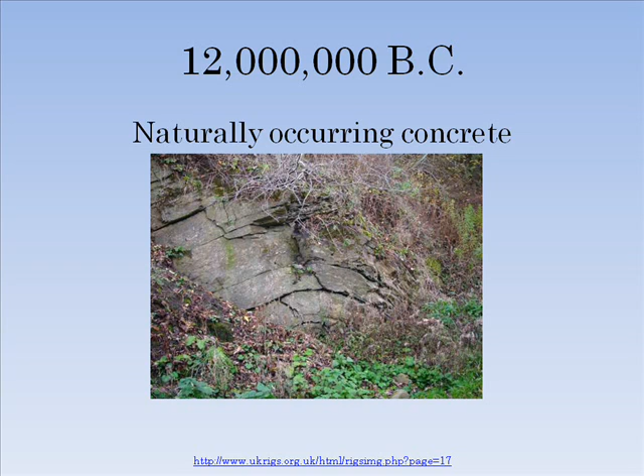Archaeologists have discovered evidence from 5600 BC of the early use of concrete in Europe. Along the banks of the Danube River in Yugoslavia, the concrete was used to make the floors of huts.

One of the earliest uses for this new type of concrete was to build water storage tanks.

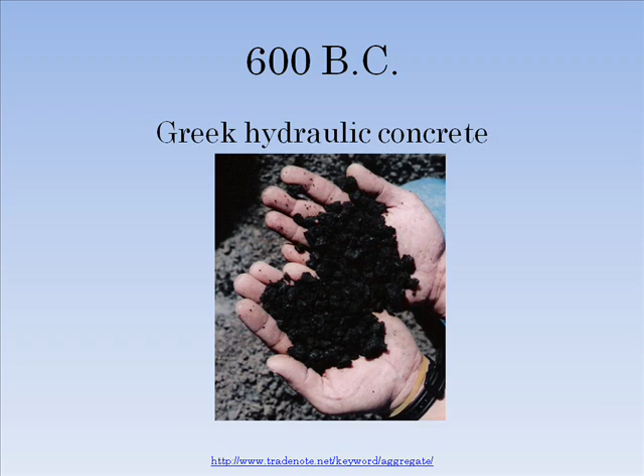By 80 AD, the Romans were building many projects from concrete. Two of these included the aqueducts and the Colosseum. The aqueducts were built by Roman army engineers to bring fresh water to Rome and other major cities.

The Colosseum was an outdoor amphitheater built to host gladiator fights and other special events. It was built from concrete and stone together, and one of the big secrets of the Colosseum was that the outdoor passageways used vaulted ceilings, which added a lot of strength to the building without adding additional weight.

In 128 AD, the Romans built the Pantheon. It was one of their greatest engineering marvels, and the span of its dome was not surpassed for hundreds of years. Its dome was made in tapering steps that ranged from 20 feet thick at the base to 7.5 feet thick at the top.

After 400 AD and the fall of the Roman Empire, many of the innovations the Romans had made in concrete were lost.

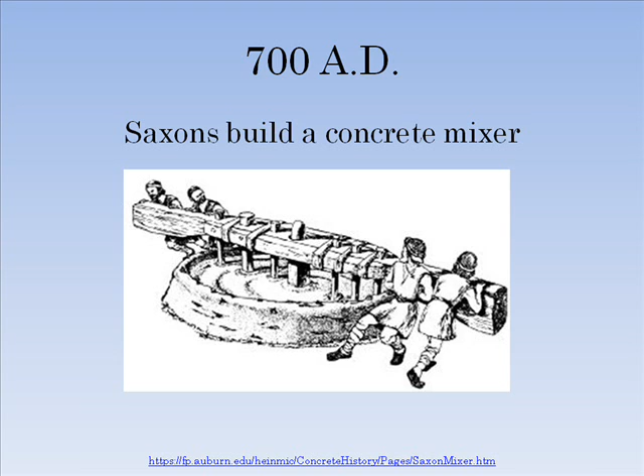Around 700 AD, the Saxons built the first concrete mixer. It was in the form of a shallow bowl cast into bedrock. A beam with paddles attached to it rotated about a central post and was powered by humans or animals.

In 1756, John Smeaton rediscovered hydraulic cement through repeated testing in fresh and salt water. He discovered that cement would harden underwater if it was produced from limestone that had large amounts of clay. He produced the first high-quality cement since the fall of the Roman Empire.

In 1824, a bricklayer and mason from Leeds, England named Joseph Aspdin filed a patent for what he called Portland cement. The name came from its resemblance to stone from the Isle of Portland.

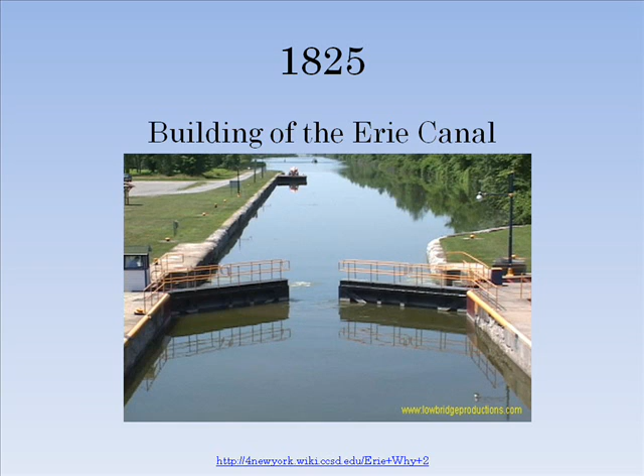In 1825, the building of the Erie Canal created the first large demand for cement in the United States. The cement that was used was made from hydraulic lime.

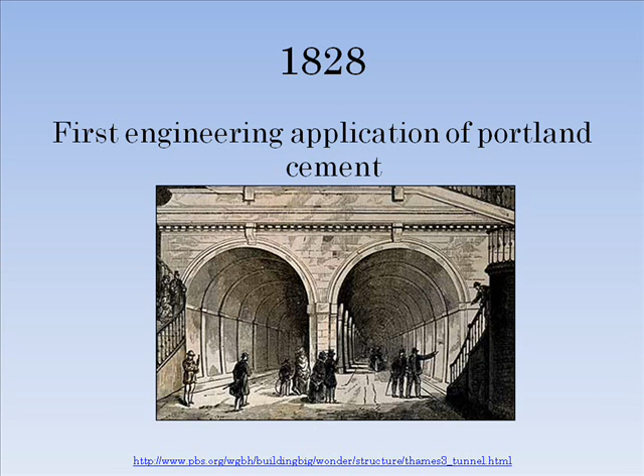In 1828, the first engineering use of Portland cement was credited to Isambard Brunel. He used the cement to fill a breach in the Thames Tunnel.

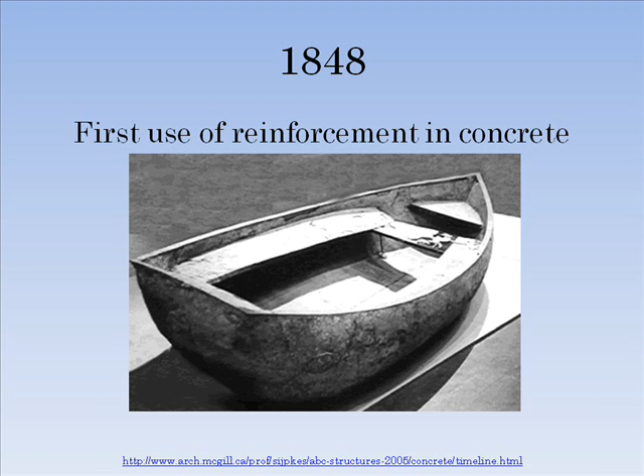In 1848, reinforcement was used in concrete for the first time by Joseph-Louis Lambot. He constructed several small rowboats out of concrete, using iron bars and wire mesh as reinforcement.

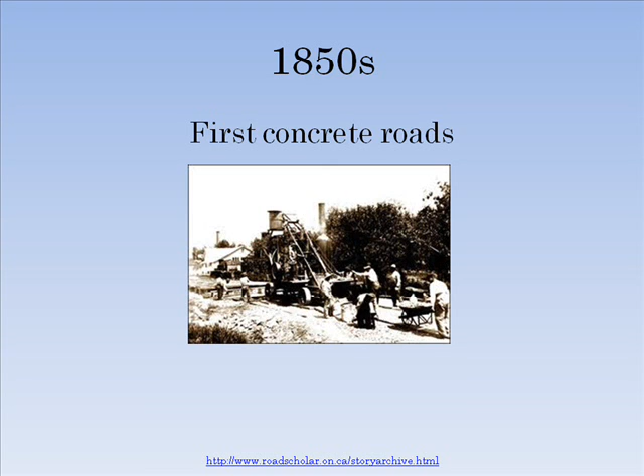In the 1850s, the first concrete roads were built in Austria. The idea spread to England by 1865 and then to the rest of the world.

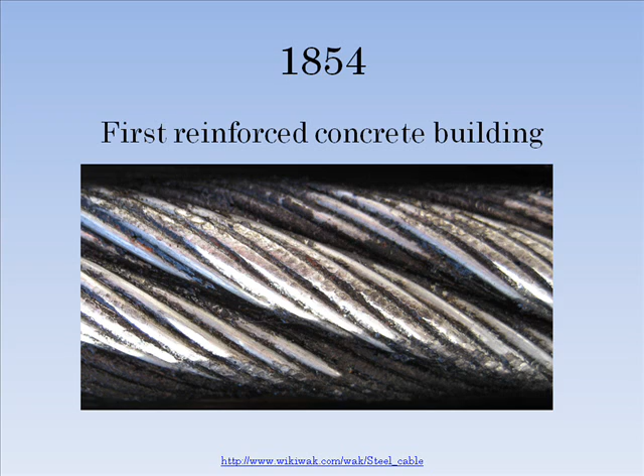In 1854, the first reinforced concrete building was created by William Wilkinson. He built a small two-story concrete servants' cottage that had the floor and roof reinforced with iron bars and wire rope. In 1871, David O. Saylor...

Saylor established the first Portland cement plant in the United States in Coplay, Pennsylvania. Although popular in Europe, concrete was not produced in the United States until 1871. Saylor experimented with selecting and mixing different kinds of rock from his quarries to produce Portland cement.

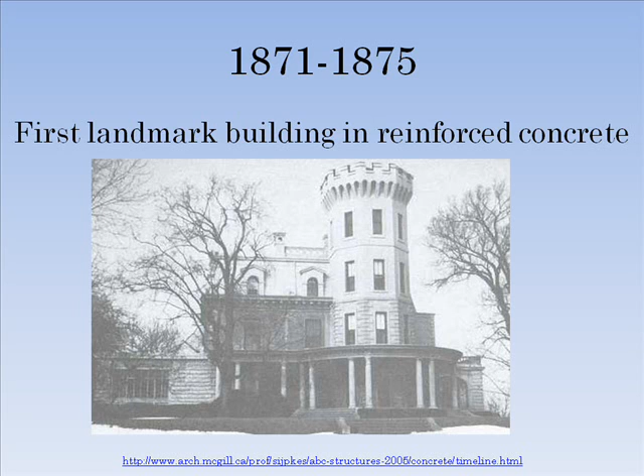In 1871, William Ward built the first landmark building using reinforced concrete in Port Chester, New York. The architect was Robert Mook. The reason why he used reinforced concrete was because his wife was terribly afraid of fire. Ward handled all technical and construction issues himself, and to this day the house still stands.

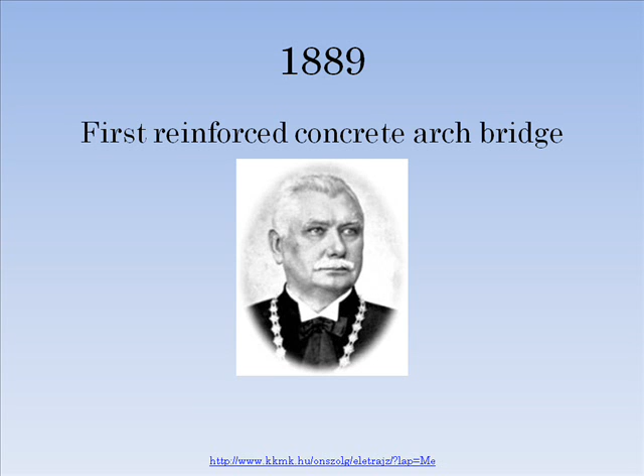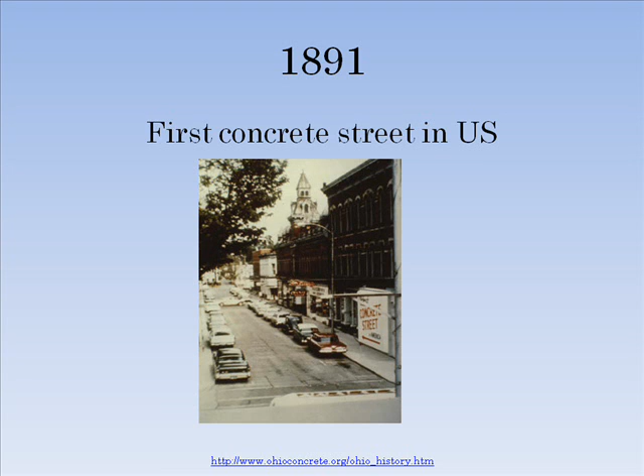George Bartholomew placed the first concrete street in the United States in Bellefontaine, Ohio. It still exists to this day. The street was an 8-foot strip. Studies show this pavement had a breaking strength of 8,000 psi, which is actually stronger than concrete used today. A section of this concrete won first prize at the Chicago World's Fair of 1893 for engineering technology.

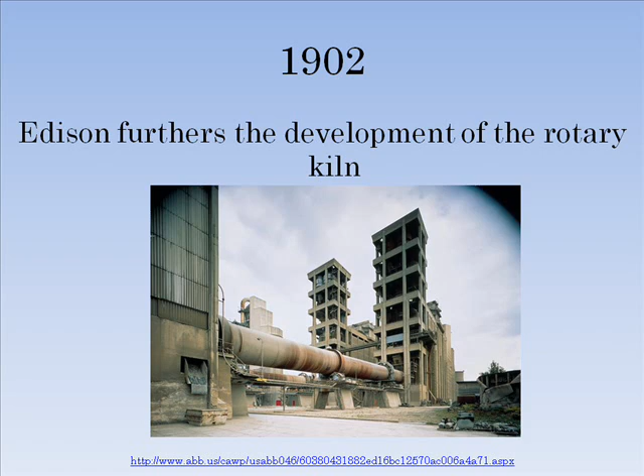In 1904, the Ingalls Building was the first concrete skyscraper. It was constructed in Cincinnati, Ohio in 1904 and made use of the Ransome system of reinforcement. It was not only the first concrete skyscraper in America, it was the first concrete skyscraper in the whole world. Reflecting its importance as the first high-rise of its type, the Ingalls Building was designated a National Historic Civil Engineering Landmark in 1974. It was added to the National Register of Historic Places in 1975.

In 1908, Thomas Edison patented a system of cast iron molds for a monolithic concrete house that forms walls, floors, stairways, roof, bath and laundry tubs, and conduits for electric and water service in one single casting operation. The plan was patented on December 22, 1908, and during the following months, Edison designed a series of complex molds which would serve as forms for his concrete houses.

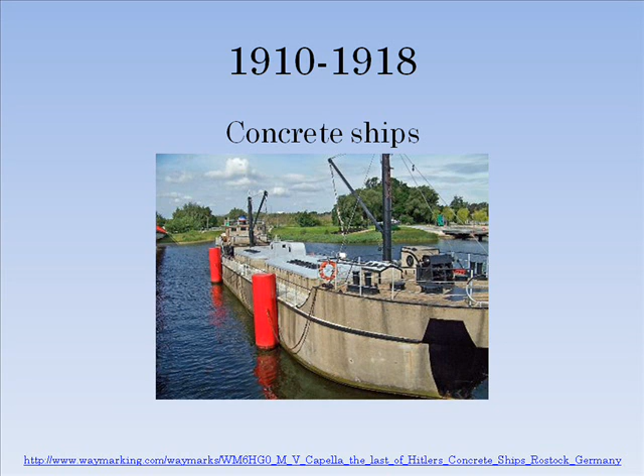In 1910, a Norwegian civil engineer named Fougner thought of using concrete to build ships. It wasn't until 1917, when wartime steel shortages required the use of cement for construction, that Fougner's idea was used. In 1918, a concrete ship, the Atlantus, was commissioned. N.K. Fougner of Norway launched the first ocean-going concrete ship, an 84-foot longboat named the Namsenfjord. Seeing that this was a success, several smaller vessels were created.

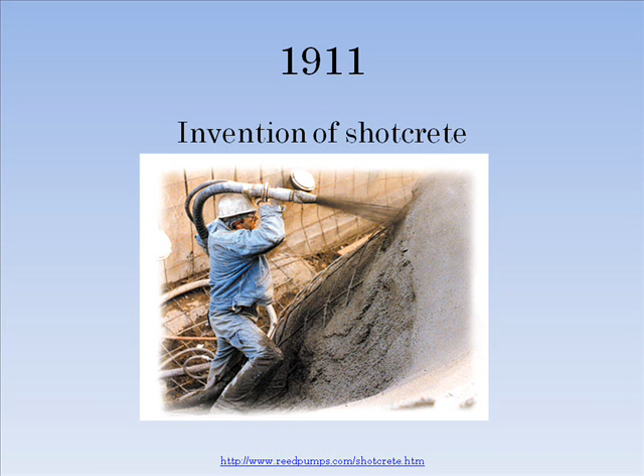In 1911, with the invention of shotcrete, came the ability to place concrete on vertical or horizontal surfaces without forms. This process has paved the way for easier placement procedures and for an alternative repair method. Shotcrete is, in effect, a version of a cast-in-place concrete wall. Rather than placing concrete into forms, however, a fresh mix is sprayed onto wall panels that have been erected in the shape of the building.

In 1913, the first patent for a concrete pump was filed. This made concrete transportation easy and allowed on-site mixing. The pump basically replaces the wheelbarrow in pumping. It brings the concrete to the place where it has to go. The speed at which concrete is pumped is a lot faster also. A wheelbarrow load of concrete is pumped in seconds with a pump. So really, it is much more effective than a wheelbarrow ever was.

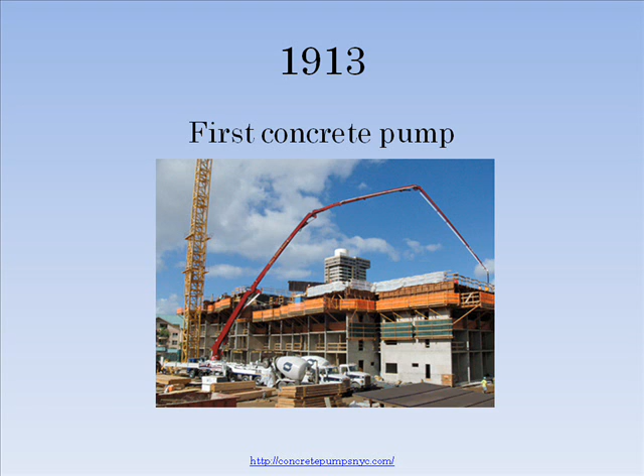In 1914, the Panama Canal is opened after decades of construction. It features 3 pairs of concrete locks with floors as thick as 20 feet and walls as thick as 60 feet at the bottom. The total concrete for the canal in cubic yards was 5 million. The weight of 1 cubic yard of concrete was 1.5 tons.

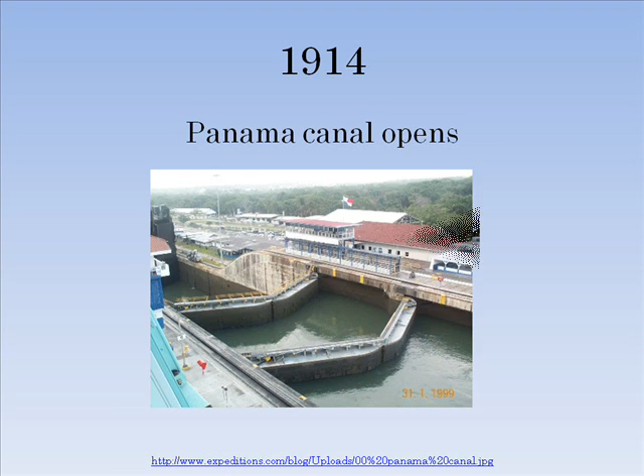In 1917, the first standards for Portland cement came about. These standards were set out and published in 1916 by the U.S. Bureau of Standards and American Society for Testing Materials, but did not come into effect until January 1st, 1917. This is a big leap from back in 1898, where there were actually 91 different formulas for Portland cement. By creating this standard, it ensured that all concrete mixtures would be the same.

In 1930, air entraining agents were introduced. These were used to improve the concrete's resistance to freezing and thawing by adding small amounts of air into the mixture.

Other advantages: the air bubbles increased the cohesion of the fresh mix, which means less bleeding and segregation. It also helped with workability, which was increased because of the ball bearing effect of the bubbles.

In 1936, the first major dams were built, including the Hoover Dam. It was a horizontal arch design which ensured the great compression strength of the concrete is employed. Then there was the Grand Coulee Dam, which is said to have enough concrete to build a 4-foot wide, 4-inch deep sidewalk that's twice around the equator.

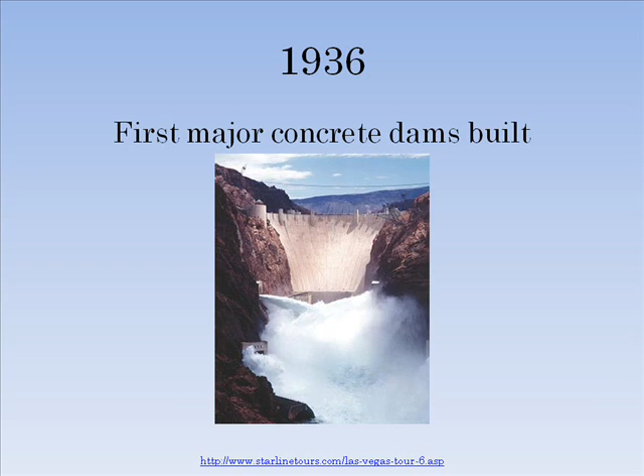In 1936, Frank Lloyd Wright built Falling Water, recognized as one of his finest works. Wright was also the first one to exploit the cantilever, supported by reinforced concrete. The floors were upside-down T-shaped beams integrated into a monolithic concrete slab, which formed the ceiling of the space below and provided resistance against compression.

1962 was the beginning of the use of reinforced concrete in modern skyscrapers. This was used in the Twin Towers at Marina City in Chicago, which both stood 588 feet tall. When finished, the two towers were both the tallest residential buildings and the tallest reinforced concrete structures in the world.

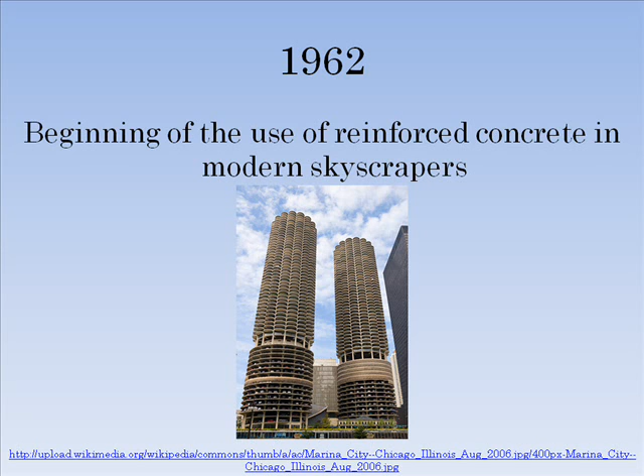In 1967, the first concrete sports dome was created. The Assembly Hall was constructed at the University of Illinois in Champaign-Urbana. A 400-foot pre-stressed saucer, the roof was cast into 24 segments of 15 degrees each, with each segment 52 feet wide at the rim and 6.5 feet wide at the center.

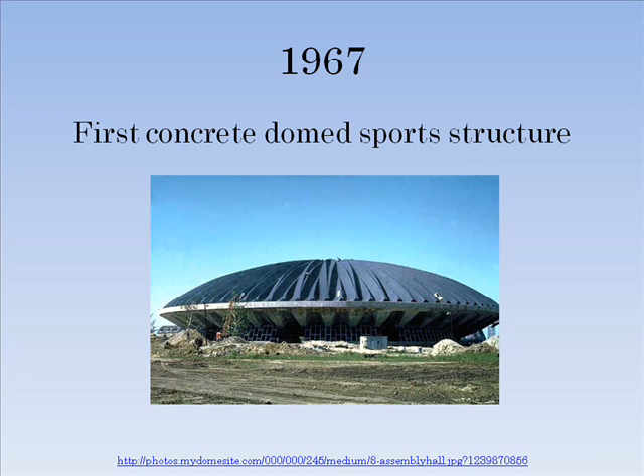The central ring beam, at the very center of the dome, is a heavily reinforced 4-foot thick concrete slab containing 170 cubic yards of lightweight concrete. The entire roof is 2,880 cubic yards of lightweight concrete, weighing only 105 pounds per cubic foot.

In the 1970s, fiber reinforcement was introduced. Concrete reinforced with fibers is less expensive than hand-tied rebar, while still increasing tensile strength many times. There are different types of fibers that can be used. Steel is the strongest commonly available fiber and can come in different lengths and shapes. Steel fibers can only be used on surfaces that can tolerate or avoid corrosion and rust stains.

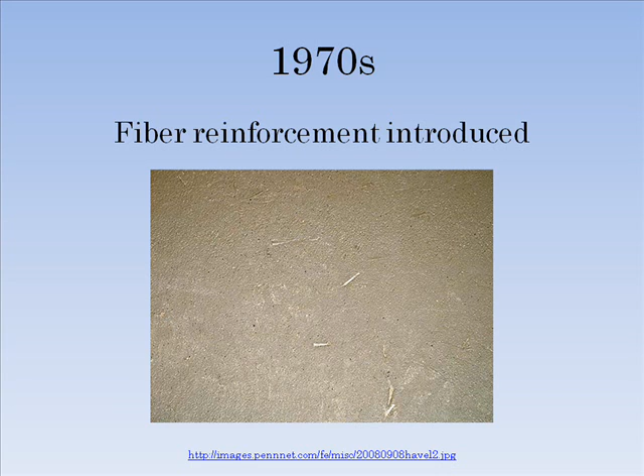In some cases, steel fiber surfaces are faced with other materials. Another type of fiber is glass fiber, which is inexpensive and corrosion-proof, but not as ductile as steel.

In 1976, the CN Tower was completed in Toronto, Canada. This became the world's tallest freestanding structure on land, standing 1,815 feet tall and made with reinforced concrete. To build the main support pillar, a hydraulically raised slip form was built at the base.

This was a fairly impressive engineering feat on its own, consisting of a large metal platform that raised itself on jacks about 20 feet per day as the concrete below set. Concrete was poured continuously by a team of 1,537 people.

In 1983, Syndecrete was developed. It was created as an alternative to limited or non-renewable natural materials. It's a lightweight architectural concrete composite made primarily of cement, western coal fly ash, and waste polypropylene fiber from a carpet manufacturing plant.

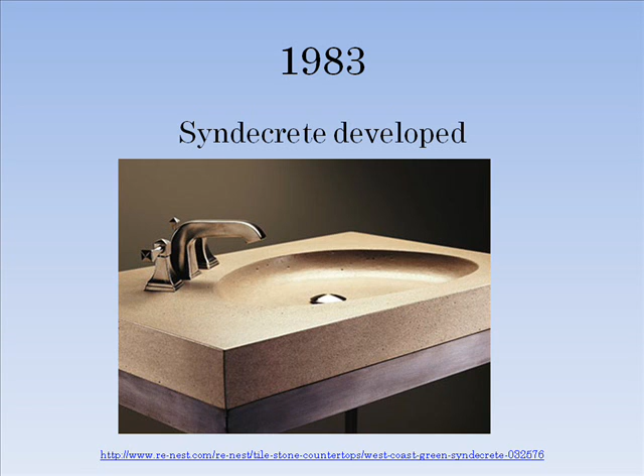This is used in many applications such as kitchen countertops, sinks, tub surroundings, tile flooring, and furniture.

In 1995, insulated concrete forms began being used in homes. These are styrofoam blocks that are built up and poured full of concrete to create a house that is relatively maintenance-free. Due to the high density of the concrete with an added layer of foam, these new homes have a great insulating system, and less sound is transmitted through the concrete walls than through conventional stud walls.